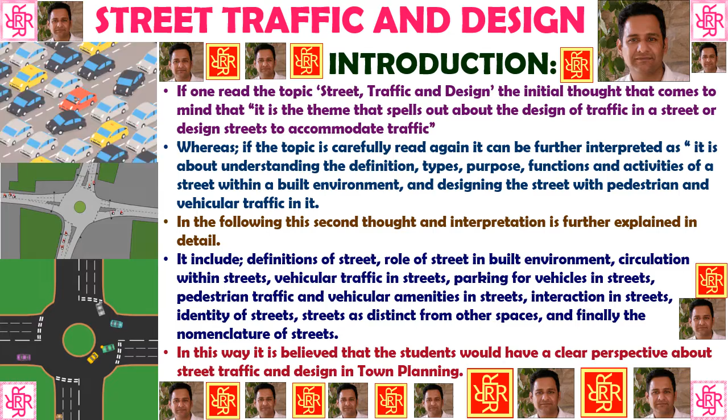It includes definition of a street, role of a street in built environment, circulation within streets, vehicular traffic in the streets, parking of vehicles in the streets, pedestrian traffic, and vehicular amenities in the streets, interaction in streets, identity of streets, streets as distinct from other spaces, and finally the nomenclature of the streets. In this way, it is believed that the student would have a clear perspective about the street traffic and design in town planning. So let's begin with the street traffic and design.

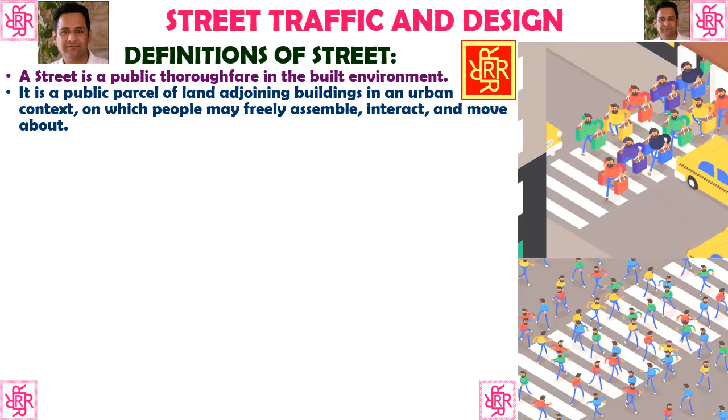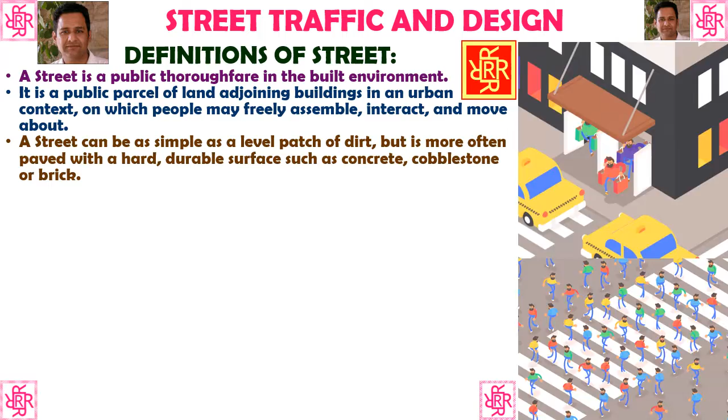Definition of a street. A street is a public thoroughfare in built environment. It is a public parcel of land adjoining buildings in an urban context on which people may freely assemble, interact, and move about. A street can be as simple as a level patch of dirt, but is more often paved with a hard, durable surface such as concrete, cobblestone, or brick. Portions may also be smoothed with asphalt, embedded with rails, or otherwise prepared to accommodate non-pedestrian traffic.

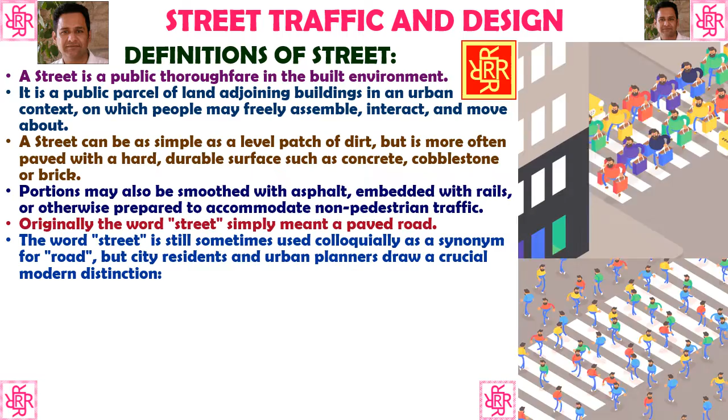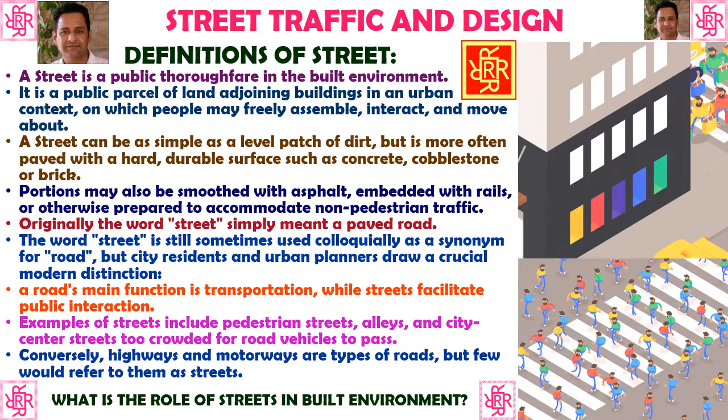Originally, the word street simply meant a paved road. The word street is still sometimes used colloquially as a synonym for road, but city residents and urban planners draw a crucial modern distinction. A road's main function is transportation, while the street facilitates public interaction. Examples of the street include pedestrian streets, alleys, and city center streets too crowded for road vehicles to pass. Conversely, highways and motorways are types of road, but few would refer to them as streets. So what is the role of streets in built environment? Let's discuss.

Role of street in the built environment. The street is a public easement, one of the few shared between all sorts of people. As a component of the built environment as ancient as human habitation, the street sustains a range of activities vital to civilization. Its roles are as numerous and diverse as its ever-changing cast of characters.

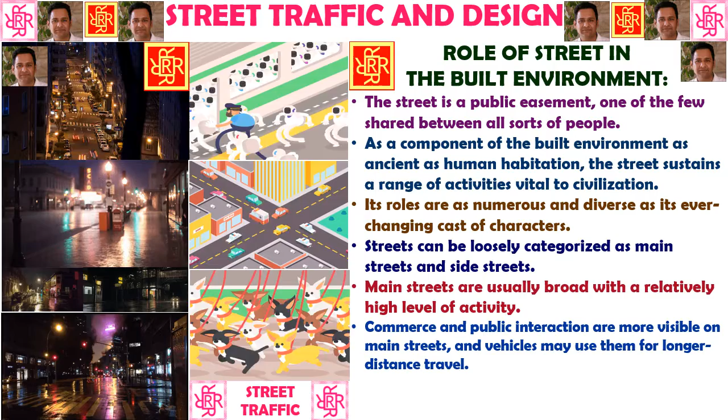Streets can be loosely categorized as main streets and side streets. Main streets are usually broad with a relatively high level of activity, and commerce and public interaction are more visible on main streets, and vehicles may use them for longer distance travel. Side streets are quieter, often residential in use and character, and may be used for vehicular parking.

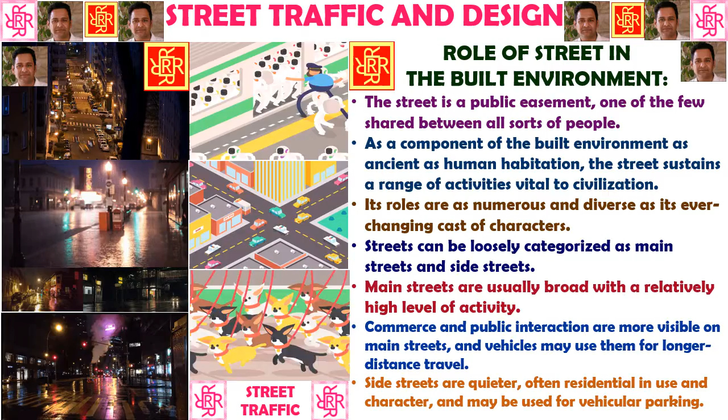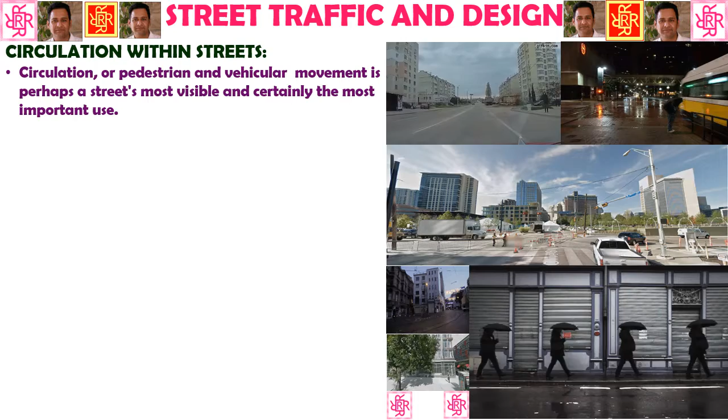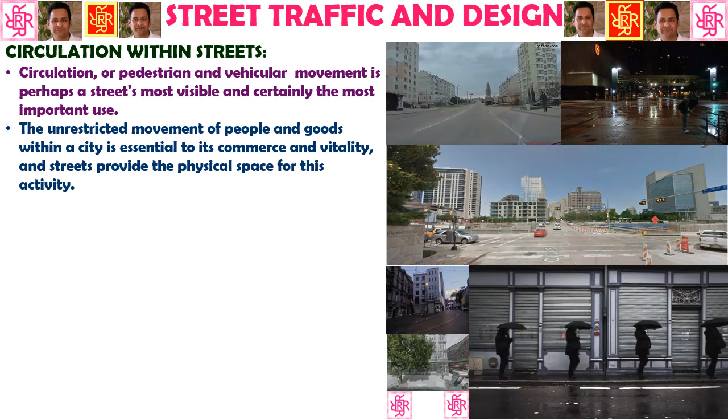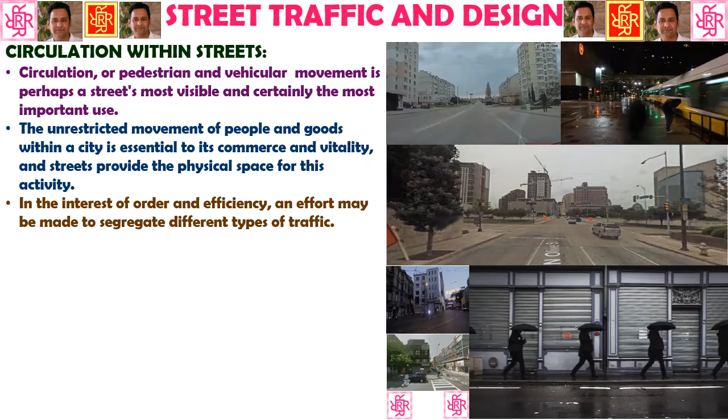How the circulation takes place within the streets. Circulation, or pedestrian and vehicular movement, is perhaps a street's most visible and certainly the most important use. The unrestricted movement of people and goods within a city is essential to its commerce and vitality, and streets provide the physical space for this activity. In the interest of order and efficiency, an effort may be made to segregate different types of traffic within the streets. This is usually done by carving a road through the middle for the motorist, reserving sidewalks on either side for pedestrians. Other arrangements allow for streetcars, trolleys, and even wastewater and rainfall runoff ditches.

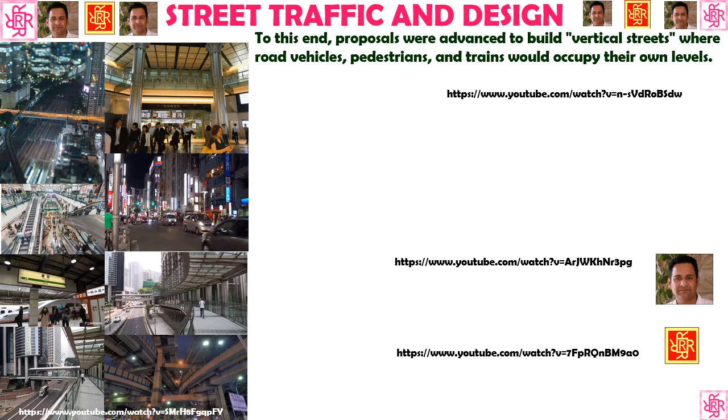In the mid-20th century, as automobiles threatened to overwhelm city streets with pollution and ghastly accidents, many urban theorists came to see this segregation as not only helpful but very necessary in order to maintain mobility of vehicles and pedestrians within the city. To this end, proposals were advanced to build vertical streets, where road vehicles, pedestrians, and trains would occupy their own levels. Such an arrangement, it was said, would allow for even denser development in the future. These plans were never implemented comprehensively, a fact which today's urban theorists regard as fortunate for the vitality and diversity of the cities, the streets and their neighborhoods.

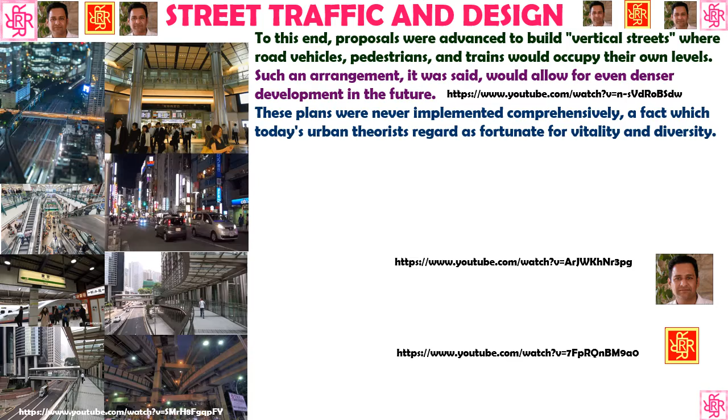Rather, vertical segregation is applied on a piecemeal basis, as in sewers, utility poles, depressed highways, elevated railways, common utility ducts, the extensive complex of underground malls surrounding Tokyo Station and the Ōtemachi subway station, the elevated pedestrian skyway networks of Minneapolis and Calgary, the underground cities of Atlanta and Montreal, and the multi-level streets in Chicago. If you want to see these, I have given you this reference on YouTube. You can see these streets of different kinds.

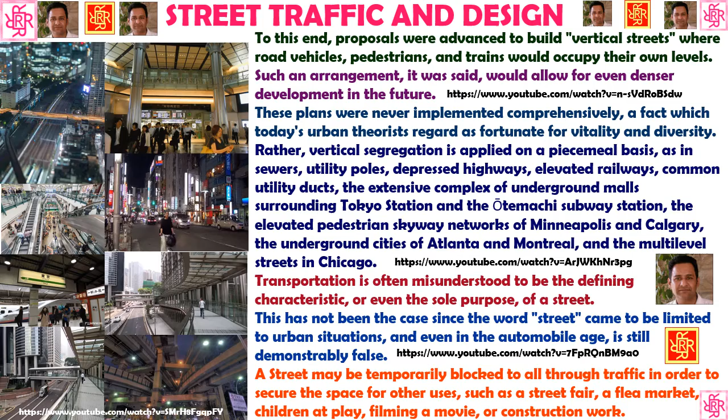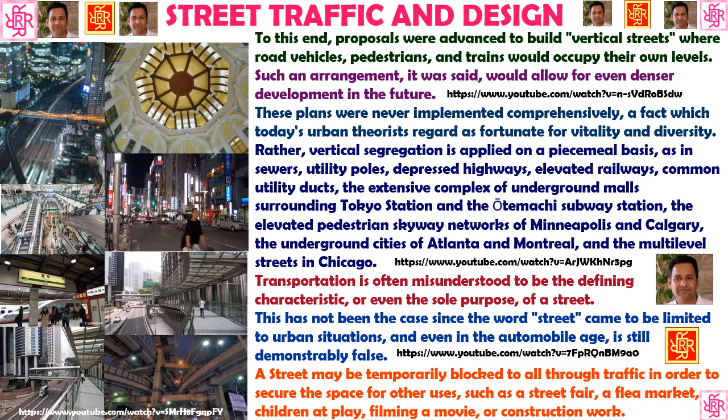Transportation is often misunderstood to be the defining characteristic or even the sole purpose of a street. It is not. This has not been the case since the word street came to be limited to urban situations. And even in the automobile age, it is still demonstrably false. A street may be temporarily blocked to all through traffic in order to secure the space for other uses, such as a street fair, a flea market, children at play, filming a movie, and construction works. So streets have a variety of functions and activities that take place within the street.

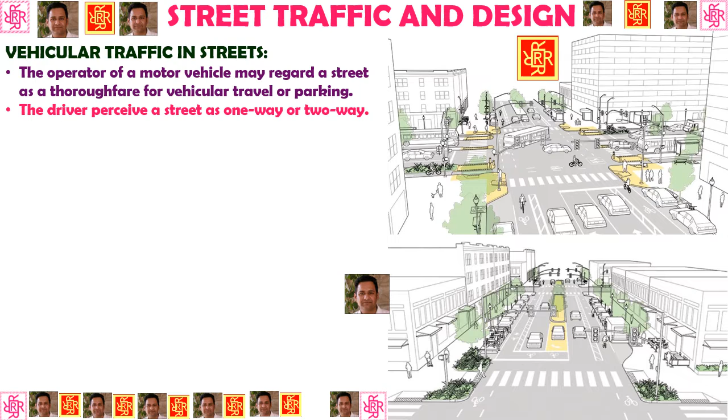What about vehicular traffic in the streets? The operator of a motor vehicle may regard a street as a thoroughfare for vehicular travel or parking. The driver perceives a street as one way or two way. One-way streets have signs reading one way and an arrow showing the direction of the allowed travel. Two-way streets are wide enough for at least two lanes of traffic. Which lane is for which direction of traffic depends upon the country the street is located in.

On broader two-way streets, there is a center line marked in the middle of the street separating lanes. Occasionally, there may be a median strip separating lanes of opposing traffic. If there is more than one lane going in one direction on a main street, these lanes may be separated by intermittent lane lines marked on the street pavement. Side streets do not have center lines or lane lines. So you see that there are various types of streets and vehicular traffic in them.

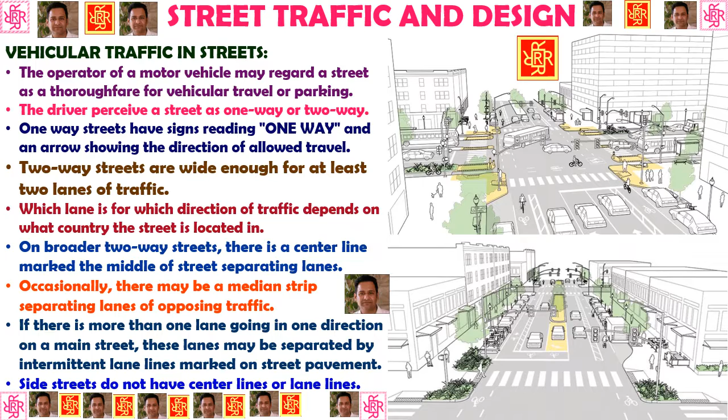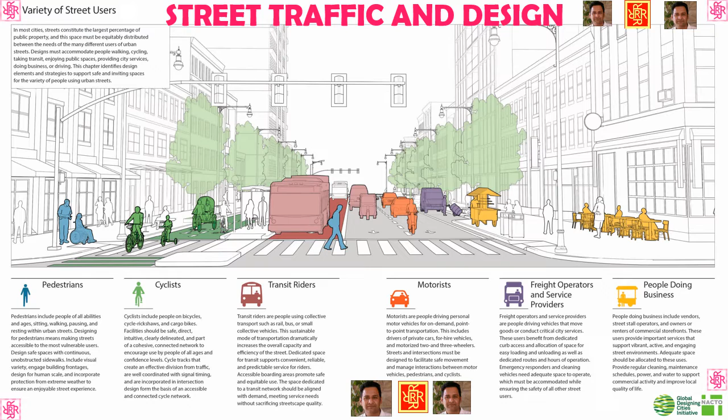Now let's look at street traffic and design. There is a variety of street users. We must know who uses the street before the design of the street. There are pedestrians, cyclists, transit riders, motorists, freight operators and service providers, and people doing business in the streets. So let's talk about these different people and activities within the streets.

First of all, let's talk about the variety of street users. In most cities, streets constitute the largest percentage of public property, and this space must be equitably distributed between the needs of the many different users of urban streets. The design must accommodate people walking, cycling, taking transit, enjoying public spaces, providing city services, doing business, or driving. So this lecture identifies the design elements and strategies to support safe and inviting spaces for the variety of people using urban streets.

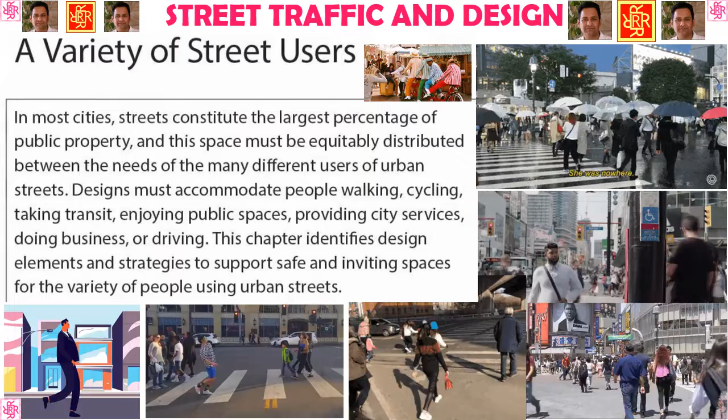First of all, let's talk about pedestrians. Pedestrians include people of all abilities and ages, sitting, walking, pausing, and resting within the urban streets. Designing for pedestrians means making streets accessible to the most vulnerable users. Design safe spaces with continuous, unobstructed sidewalks. Include visual variety, engaging building frontage, design for human scale, and incorporate protection from extreme weather to ensure an enjoyable street experience. As there is a variety of pedestrians, some can walk and some cannot walk, so the street must have smooth surfaces.

Then there are cyclists. Cyclists include people on bicycles, cycle rickshaws, and cargo bikes. Facilities should be safe, direct, intuitive, clearly delineated, and part of a cohesive, connected network to encourage use by people of all ages and confidence levels. Cycle tracks that create an effective division from traffic, are well coordinated with signal timing, and are incorporated in the intersection design form the basis of an accessible and connected cycle network. So the street must have space for cyclists.

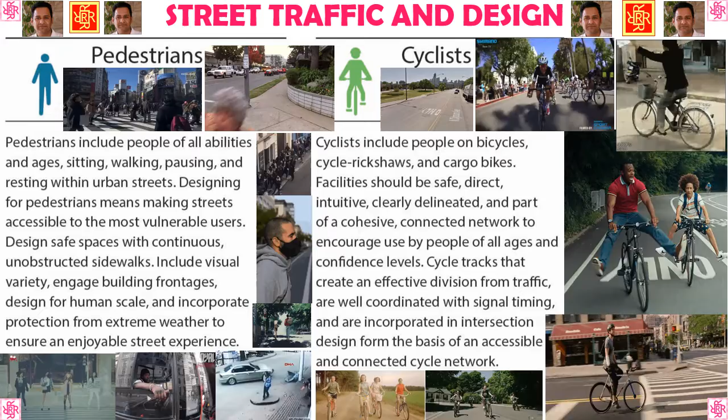Then there are transit riders. Transit riders are people who are using collective transport such as rail, bus, or small collective vehicles. This sustainable mode of transportation dramatically increases the overall capacity and efficiency of the street. Dedicated space for transit supports convenient, reliable, and predictable services for riders. Accessible boarding areas promote safe and equitable use. The space dedicated to a transit network should be aligned with demand, meeting service needs without sacrificing streetscape quality or the beauty of the street.

Then there are motorists, who also use the streets. Motorists are people driving personal motor vehicles for on-demand point-to-point transportation. This includes drivers of private cars, for-hire vehicles, and motorized two- and three-wheelers. Streets and intersections must be designed to facilitate safe movement and management of interactions between motor vehicles, pedestrians, and cyclists. So these are very important elements of street traffic and design.

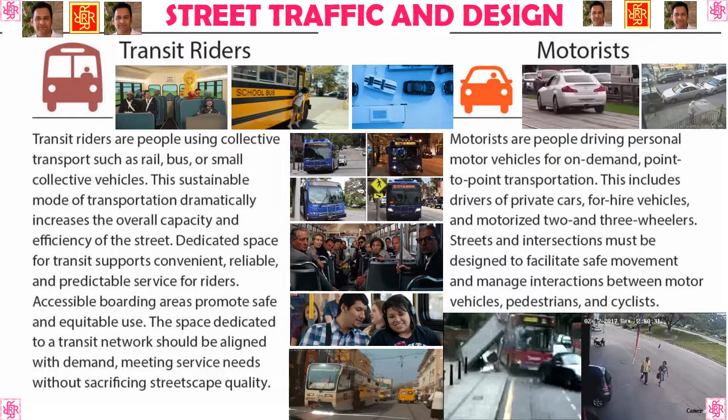Then there are freight operators and service providers which also use the streets. The freight operators and service providers are the people driving vehicles that move goods or conduct critical city services. These users benefit from dedicated curb access and allocation of space for easy loading and unloading, as well as dedicated routes and hours of operation. The emergency responders and cleaning vehicles need adequate space to operate within the streets, which must be accommodated while ensuring the safety of all the other street users.

Then there are people in the street who are doing business in the street. They must also be accommodated. People doing business include the vendors, the street stall operators, and the owners or renters of the commercial street fronts or store fronts. These users provide important services that support a vibrant, active, and engaging street environment. Adequate space should be allocated to these users. Provide regular cleaning, maintenance schedules, power and water to support the commercial activity and improve local quality of life, because these commercial activities are very important for the sustenance of the community living within neighborhoods.

Now, furthermore, there are also some green street principles. Let's discuss green street principles. The first is to protect and restore the natural resources within the streets. Then to promote health, equity and human habitat. Then we should design for safety and mobility. There are also three more. Then there is design for the life cycle. When we design the street, we should design for the whole life cycle. And design for resilience to climate change and other natural and man-made disasters. And there must be optimization for the performance of the streets. So these are the six basic green street design principles.

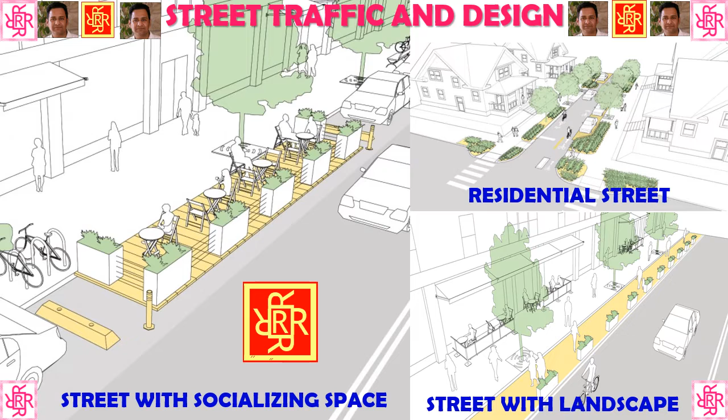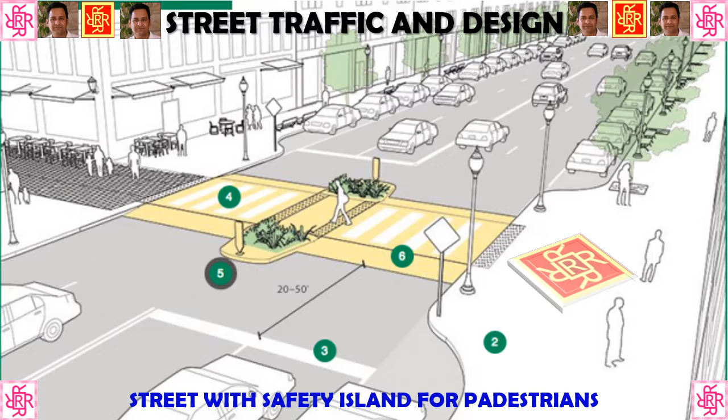Now let's further go and look at different street traffic and design. This is a neighborhood street that you are looking at. Then this is the residential street on the top. Then there is a street with landscape. Then there's a street with socializing space. So a street must have all these different kinds of physical, social, and economic activity spaces for a good, healthy environment and good quality of environment within the street. If vehicles are allowed in the street, it must have a safety island for pedestrians, so pedestrians can be given priority in movement within the streets.

Then there's the concept of a complete street. What is a complete street? Complete streets are streets which are for everyone. A street which can be used by kids, young people, old people, middle-aged people, and people with impairments, who cannot see properly, people who cannot walk, or people who are disabled in any way. So there should be universal design for disabled people and for people of all ages. These complete streets are designed and operated to enable safe access for all users, including pedestrians, bicyclists, motorists, and transit riders of all ages and abilities. So this is also important. We must design inclusive streets.

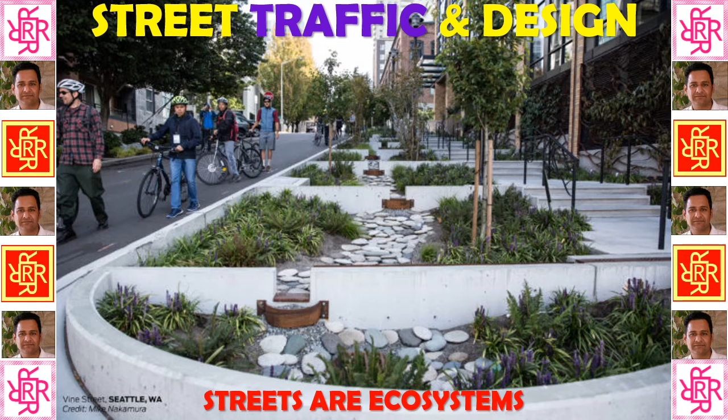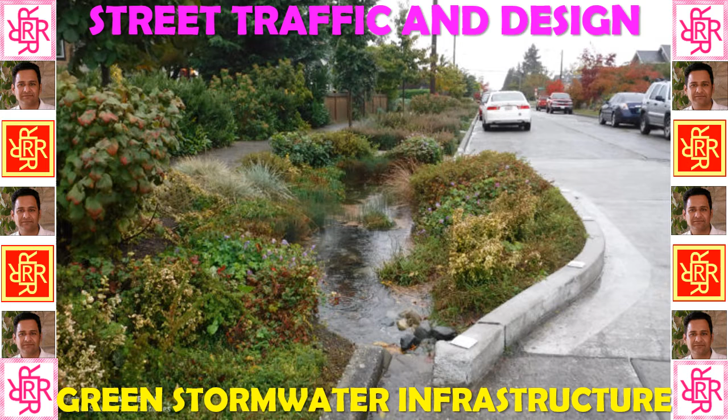Then streets are also termed as ecosystems, because we can make green streets where a variety of animals, birds and plants occur, and we can make a very good, healthy quality environment within the streets. In the developed world, they make green stormwater infrastructure, so when rain occurs, the rainwater drains automatically.

Now there are different types of streets. There is transit streets. Transit streets are those streets which have a bus stop, or you can say tramway stop, or where vehicles and pedestrians go together, and there should be a harmonious circulation pattern. These are the transit streets.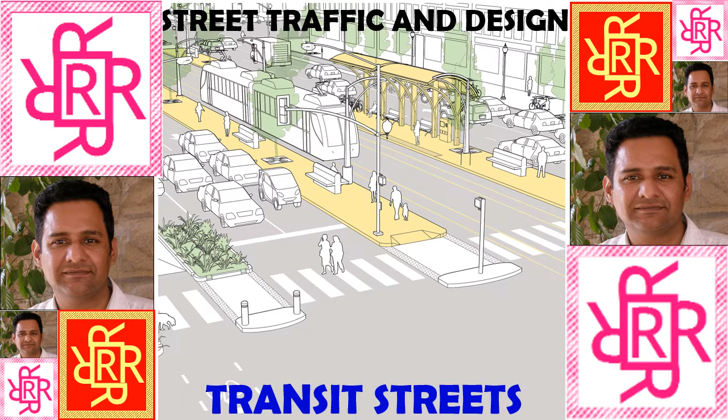You can see how it is divided into different lanes: there is a pedestrian lane, there is a vehicular lane, there is a transit lane, and then there is a social interaction lane. So these are the important things in transit streets. Here you can see the transit streets. Only for bus, there is also the exclusive right of way given to the bus, because it moves a lot of people. There is a city in South America, for example, Bogota.

They have this system where they said, okay, the streets should have equal rights for the pedestrian as well as vehicle. So what they did, they have divided the street in two portions. 50% is for vehicular movement and 50% for pedestrian movement. And whole cities develop like this. You can see such kind of examples all over the world, how the people are given share in the street space, especially the common people who are mostly poor and walk a lot, or they move on cycles.

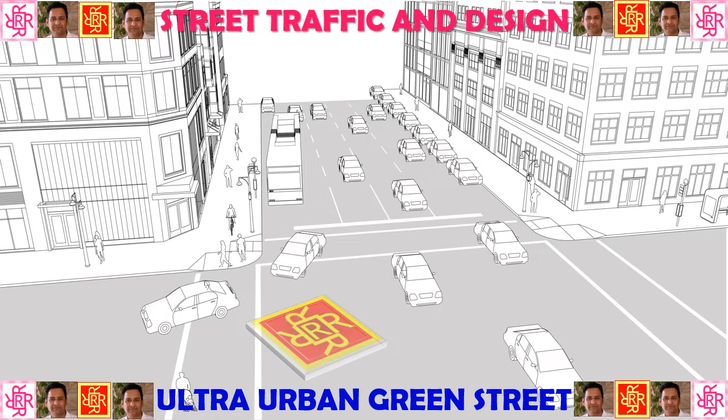Then there are ultra urban green streets. How can we make ultra urban green streets? In order to make them, first of all, tree planting is very important. Then there should be grass planting also, and there should be transit bulbs or boarding islands for the transit vehicles. And this will look like this. And in this way, the ultra urban green street can be created.

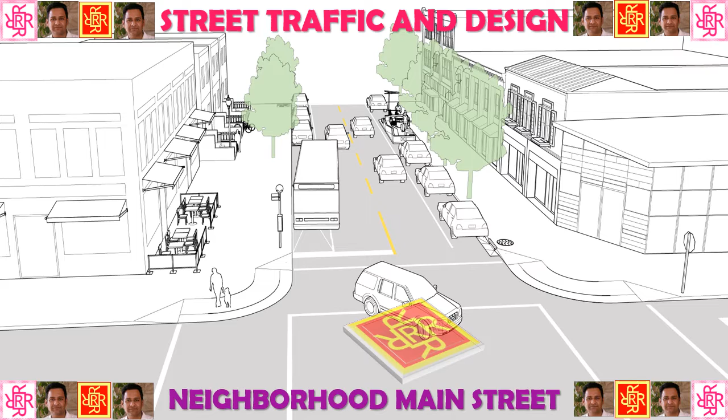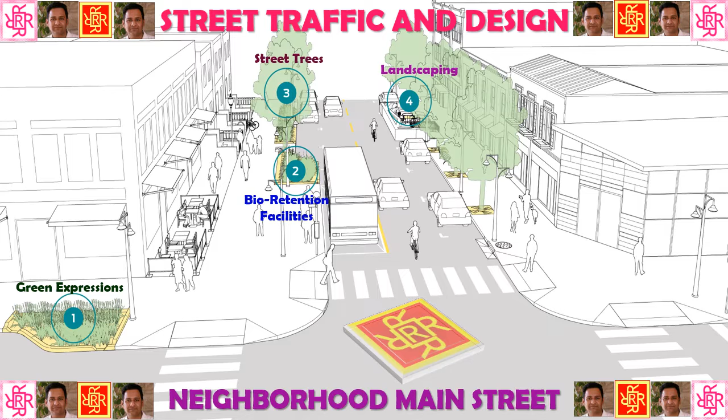The other is neighborhood main streets, because it's also important that when the vehicles are entering the neighborhood, that should be designed properly. For designing neighborhood main streets, we should have green expressions in the street, and we should have bioretention facilities. We should have street trees. We should have landscaping for social interaction, and this will make the neighborhood main street.

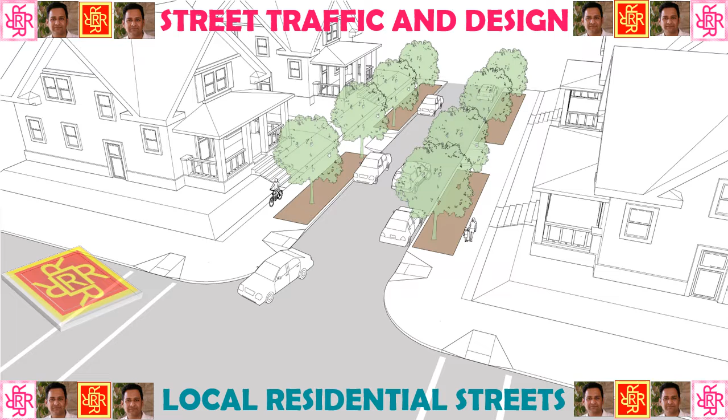Then there are local residential streets, which are leading to different houses. For design of local residential street, it's important that there should be a planting strip, there should be bike boulevard, there should be a mid-block curb, and there should be permeable pavement. And this way, the design of local residential street should be developed. You see that there is a proper movement of the people with disabilities, or people on wheelchairs can also move freely in this kind of local residential streets.

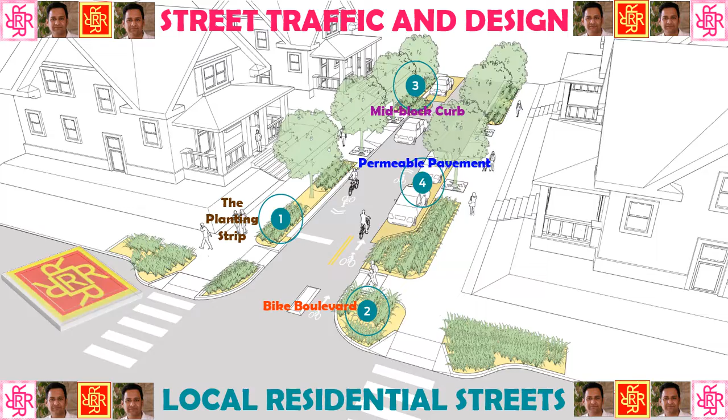Now, furthermore, there are residential shared streets. For that, there must be textured or permeable pavements. There should be trench drains to collect runoff. We should grade the street, and there should be gateway treatments. And in this way, a beautiful residential shared street can be designed.

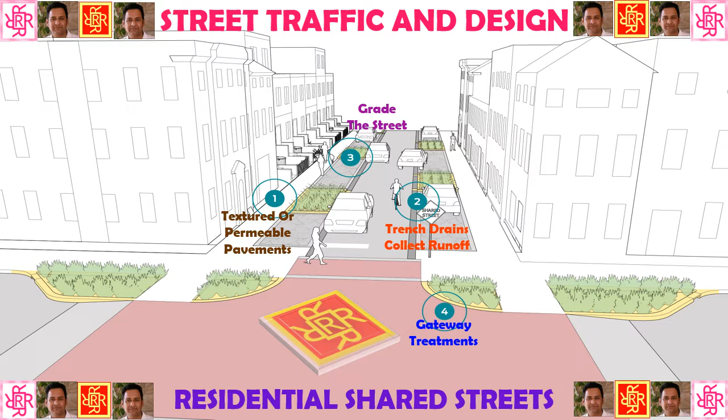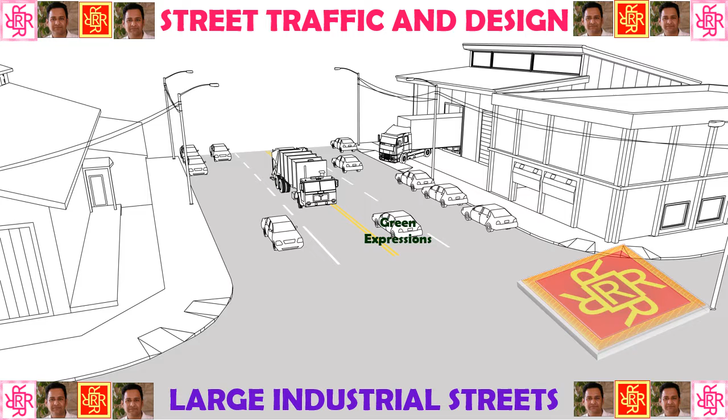Then there are large industrial streets. In the industrial zone, the street design has a different perspective. For large industrial streets, we must have green expressions. We should shorten the crossing distances. We should add bikeways and a parking lane. In this way, we can design the large industrial streets.

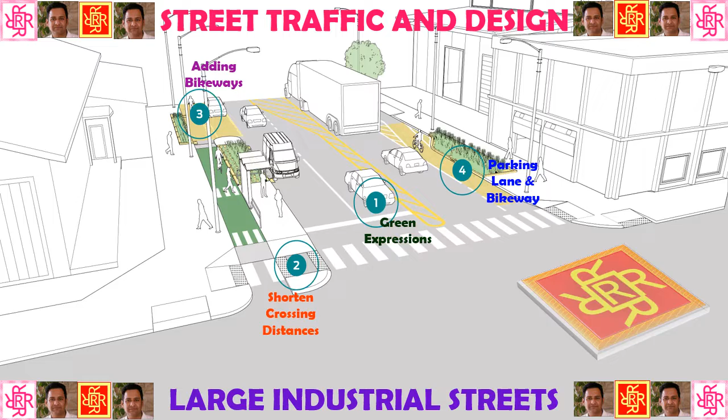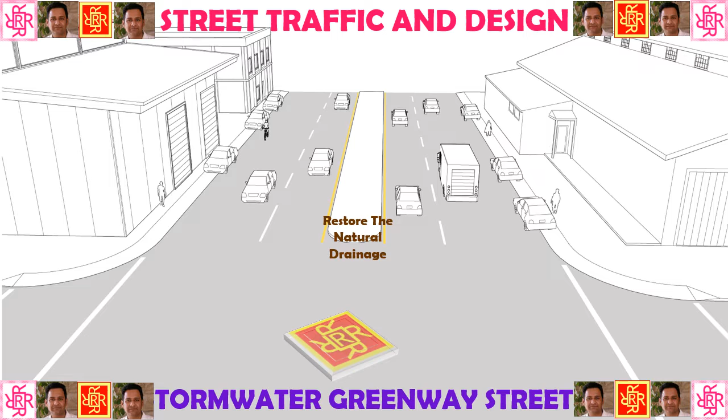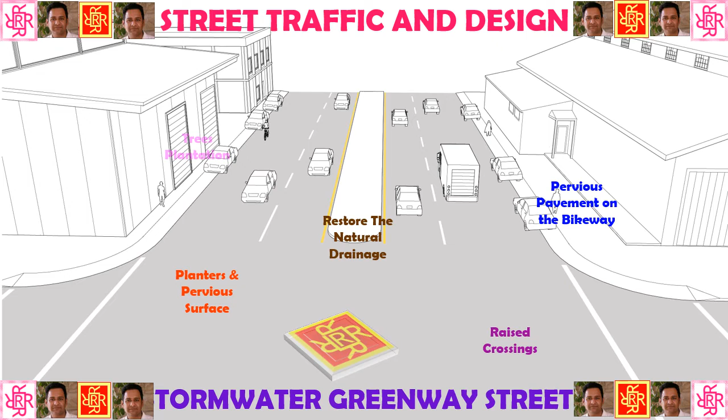Furthermore, if we go ahead, there are stormwater greenway streets. For a stormwater greenway street, first of all, the natural drainage should be restored. There should be planters and pervious surfaces, raised crossings, pervious pavement on the bikeways, and tree plantation. In this way, we can make a beautiful stormwater greenway street. In our city, you find there are so many nadis and nalas, and people are living along them. But these streets should be properly designed and developed, like this example.

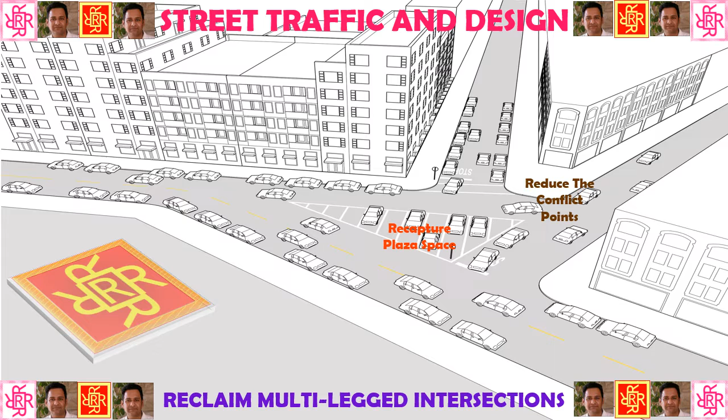Furthermore, we must reclaim the multi-leg intersections, because these are very important places which should not only be used for parking, but for social interaction, for fulfilling the social needs of the people. For that matter, we should reduce the conflict points, recapture the plaza space or public space for social interaction, and connected tree trenches should be developed. And you see, in this way, a vehicular space used only by vehicles is now a beautiful place for people's social interaction. This kind of design is also important for street traffic and design.

Conclusion. Streets are basically public space. You must understand and realize that. They should be conceived, analyzed, evaluated, and designed as public spaces with human scale design and amenities. Cities are also recognizing that streets are one of their greatest assets. A tremendous amount of land is covered by the streets in our cities. So streets should be judged by how much they can attract foot traffic and vibrant city life as much as their ability to move vehicles through quickly. As engineers, we always think most about the vehicles, but as architects, urban designers, and town planners, we must think more about people's movement and social interaction.

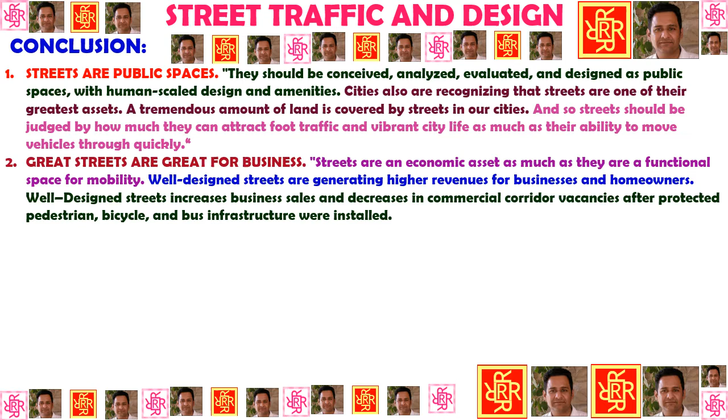Then, great streets are great for business. Streets are an economic asset as much as they are a functional space for mobility. Well-designed streets generate higher revenues for businesses and homeowners. Well-designed streets increase business sales and decrease commercial corridor vacancies after protected pedestrian, bicycle, and bus infrastructure is installed. Usually, in our context, we commercialize the streets a lot, and we do not give proper care to the pedestrians and the vehicular movement in them. This should be properly designed and developed.

Then, streets can be changed. Transportation engineers and planners have the ability to work flexibly within the right of way of the streets, moving curbs, changing alignments, redirecting traffic where necessary. Then, we should design for safety. It is one of the major street traffic and design principles. From 2001 to 2018, more than 4,800 people died while walking on the streets in Karachi. That number is completely unacceptable and we can do much better. Those injuries and deaths on the streets in Karachi can be avoided, and we need to do a better job of designing our streets for safety, so all users can interact and cross paths safely in the streets of Karachi.

Then, streets are the ecosystem. This is also another important concept to understand. We can't just treat them as asphalt or concrete covering the ground. No, we need to incorporate them into the ecosystem of the city. That means green infrastructure and stormwater management, trees that provide shade, and we should get the climate benefit from providing landscape in the city. So this is also an important aspect of street traffic and design. I hope you have understood very well what street traffic and design is.

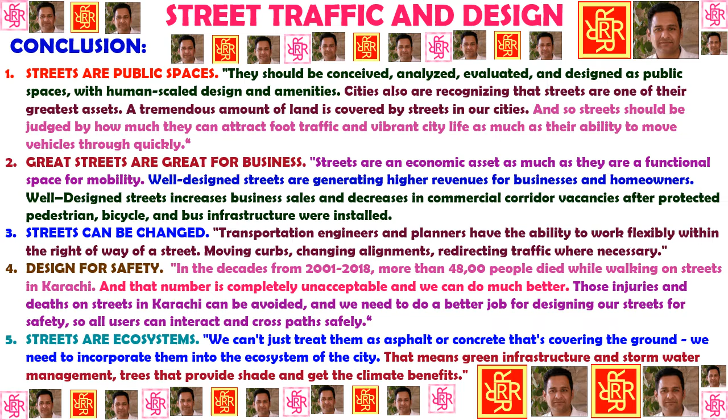Let's go ahead. Finally, let's look at a couple of videos about street traffic and design case studies abroad. This is the Complete Street Design Guideline project, Toronto.

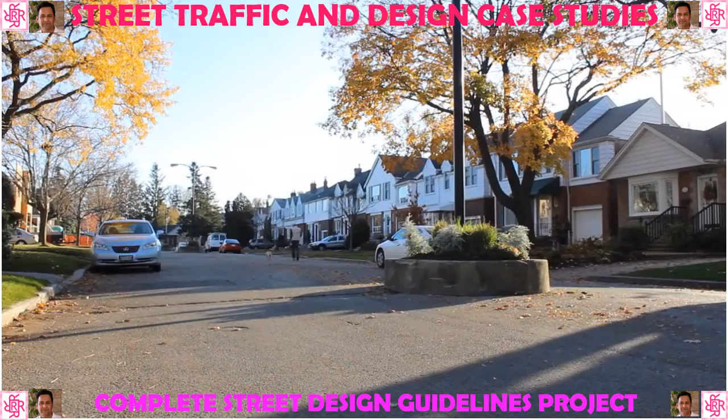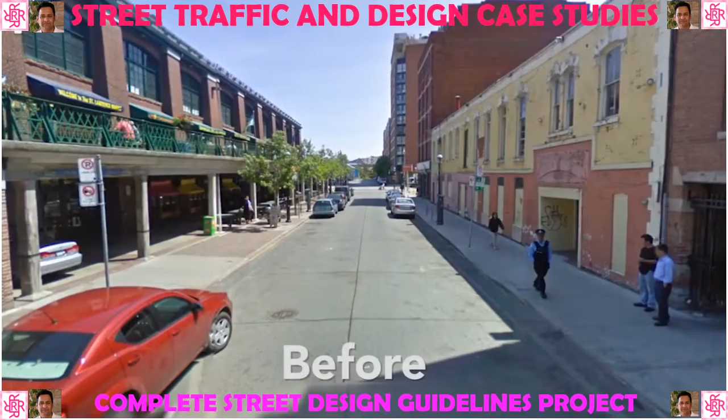Complete streets is a word that kind of emerged to talk about really planning streets for all users and uses. It's about balancing all the needs of where people live, where they work, where they commute, how they enjoy the public spaces along streets. It's about blending all those things in, and thinking about those things when you plan, design, and engineer a street. It is not one size fits all. We need to tailor-make the solutions to fit the local conditions, the site constraints. And streets really are intended to be public and social spaces, as well as their role to move vehicles, pedestrians, transit, and as places for utilities. When we design our streets for people, it's possible to choose how you're going to move around the city, because all of the infrastructure options that make walking or cycling or taking transit or driving safe options exist to make that possible.

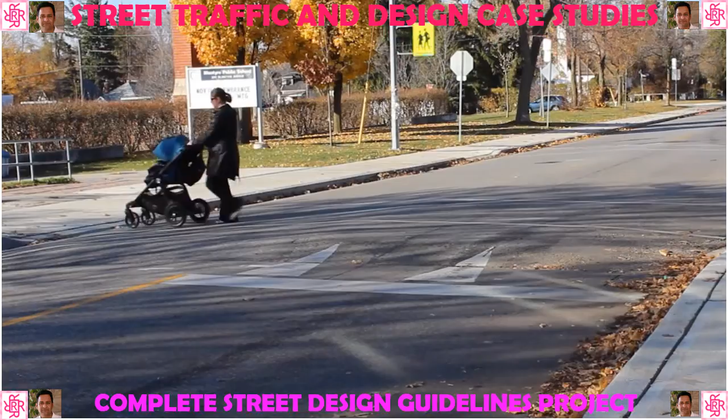We're looking at doing things like improving accessibility for persons with disabilities, making better ramps at curb locations, and also providing detection out there. Better growing environment for trees is really important, and that's what we would really like to see. It's great to see that trees and vegetation is being considered on equal footing with the other infrastructure.

Better water quality, better management of stormwater, improves air quality, improves vegetation, life of trees, the aesthetics, all of those things we can accomplish by designing things properly. People want to enjoy their streets. It's just not a place to commute through. It's a place to shop, to live, to enjoy. And complete streets is really critical in that regard.

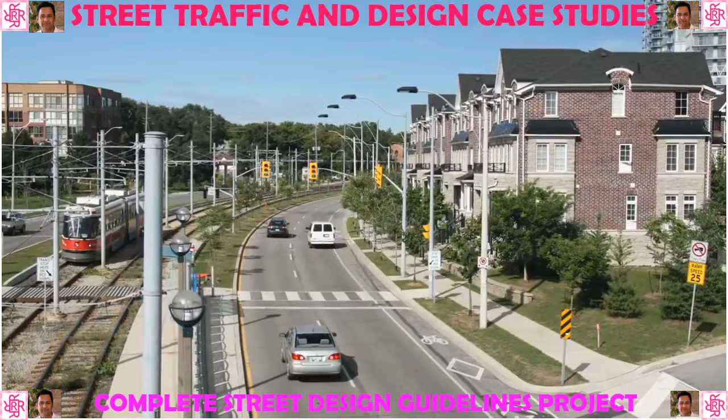Toronto already has some great streets, and I think what we're looking to do is figure out how we replicate the things that we do well here even better. The goal here is we want to provide useful guidance, both internally for our design teams and also externally for private partners who are also redeveloping. It's also an efficiency thing in terms of construction. We don't want to keep on tearing up our streets.

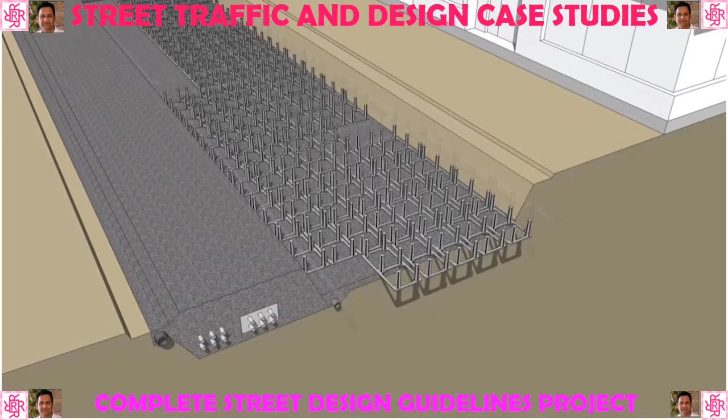So when we plan a complete street, we think about the underground utilities, the sidewalk, the trees, how it drains, bike parking, bike lanes, all those things make a complete street. So what we're doing here today and what we're launching here today is a collaborative process between transportation services and city planning to create our complete streets framework and design guidelines for the city of Toronto.

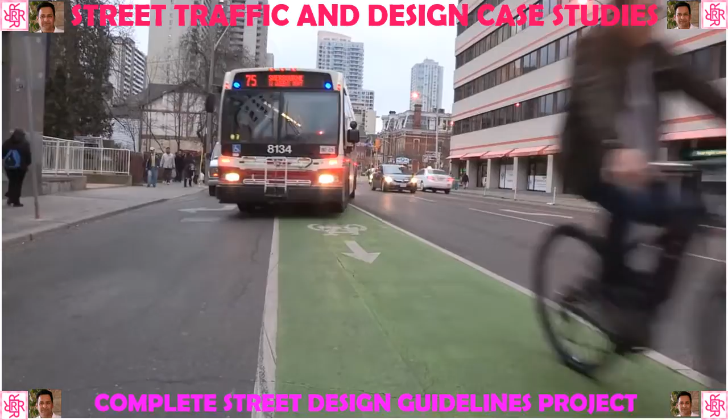We understand the issues within the public rights-of-way in Toronto. We meaningfully engage both with staff, with the broader public, and in smaller workshops. We realize that we are dealing with a multidisciplinary issue, a multidimensional opportunity, I would say. Complete streets or street design is more than a little bit about health. People are much more likely to be out and physically active if they feel that it is safe.

This city is intended to be a city where people who do not have a car are not at a disadvantage. So the city streets must be used to move people, not just vehicles. We understand Toronto's streets, not just downtown, but in all parts of the city. Creating complete walkable communities where we have meaningful work and an opportunity for everyone to thrive is a critical center point to our official plan. Effective, meaningful, and implementable complete streets design guidelines are more important than anything else, a reflection of your values.

The way to be successful is collaboration. There's lots of different constituents, lots of different priorities. The consultant said this is about values. Everybody has a lot of different ideas about what is important in this. So starting to build that consensus and engage people. I think it's really important to incorporate and engage children and families in street design.

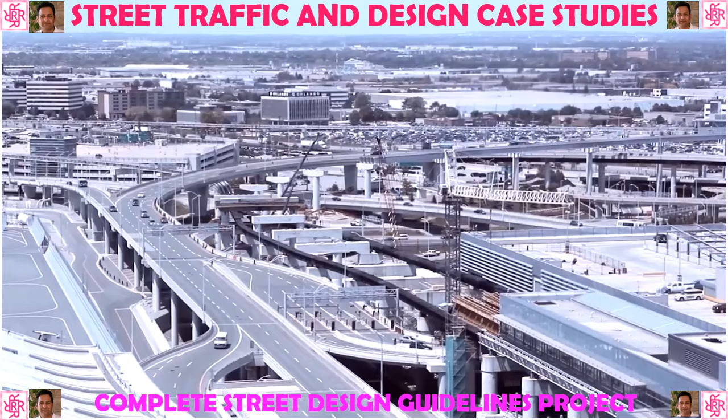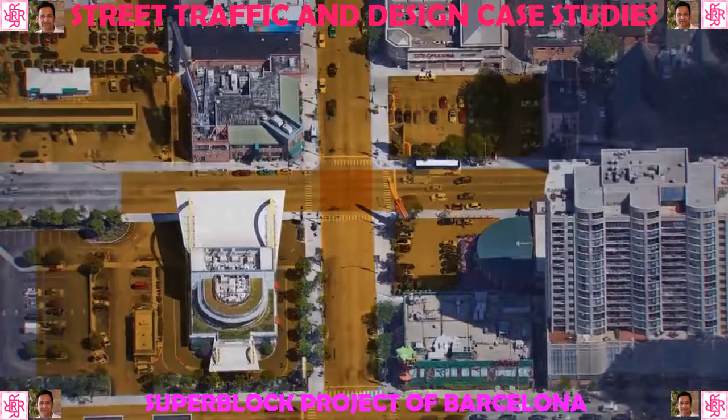So you have seen how internationally people think about designing their streets. Let's look at another case study. Concerning street traffic and design, this is a case study of the superblock project of Barcelona. If you imagine a typical American city street and you take away the space that's dedicated to cars, you aren't left with very much. There's some narrow walkways on the side and some bridges in between them, but not much else.

Cars dominate cities. Spend some time walking around most cities and you'll find yourself pushed to narrow sidewalks, waiting for crosswalk lights. You'll find cyclists navigating really narrow strips of space. Americans are used to cars the way that fish are used to water. And that's so ubiquitous in the US that I think most people, it just never occurs to them that it could be otherwise. But what if there were a way to change that, to give space back to pedestrians and bicyclists, and to make cities more friendly to life outside of a car? It turns out Barcelona might have a solution.

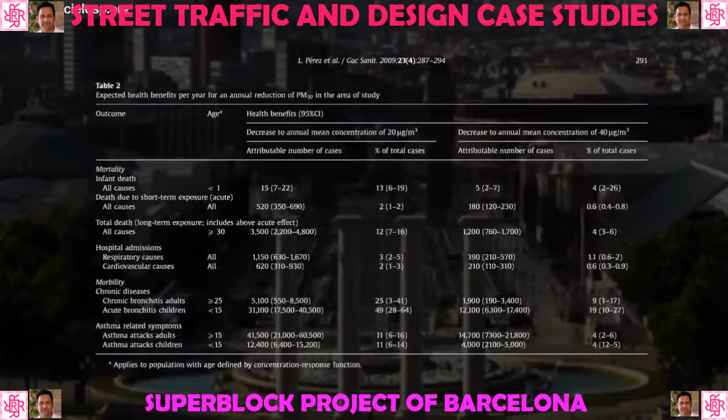In 2014, the city was faced with serious air pollution problems. Barcelona and its 35 surrounding municipalities consistently failed to meet the EU's air quality targets, and studies were showing that air pollution in the region was causing 3,500 premature deaths every year. Traffic in the city also causes severe noise pollution. So the city developed an extensive urban mobility plan with the hope of reducing traffic by 21%. The coolest part of the plan were these things.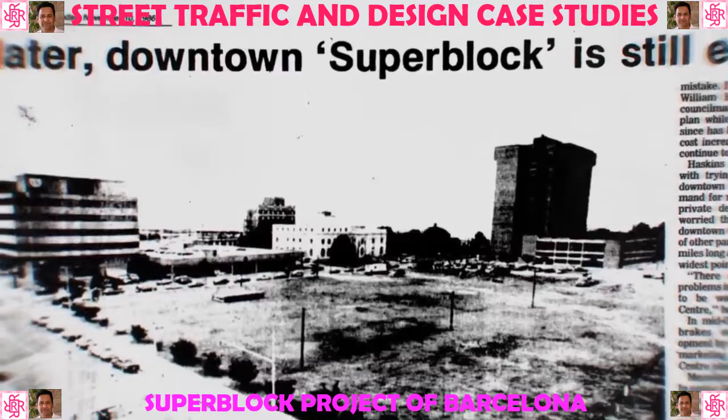They call them superilles. Superillas? Sí, superilles. That translates to superblocks. It's this urban design concept intended to minimize the presence of cars in city centers. The word superblock has been used before to describe huge city blocks without any passageways for cars, but that's not what's happening here. So here's how Barcelona's plan works.

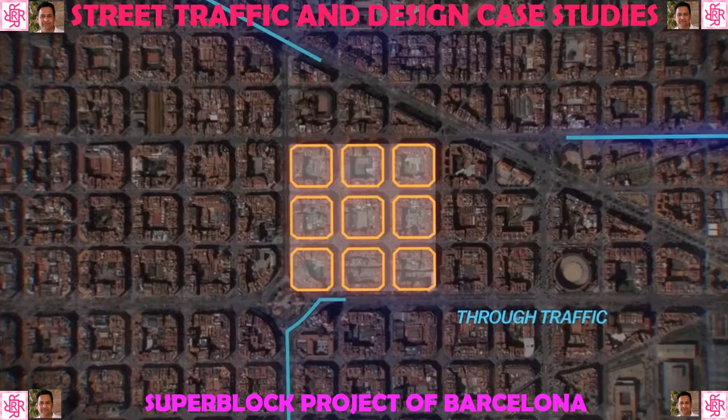You take 9 square city blocks and you close off the inside to through traffic, so buses and big freight trucks, or any vehicles that are trying to get from one part of town to the next, have to drive around the perimeter. Inside the superblock, the speed limit is kept to 10 kilometers per hour. That translates to just over 6 miles per hour. And curbside parking is replaced by underground parking.

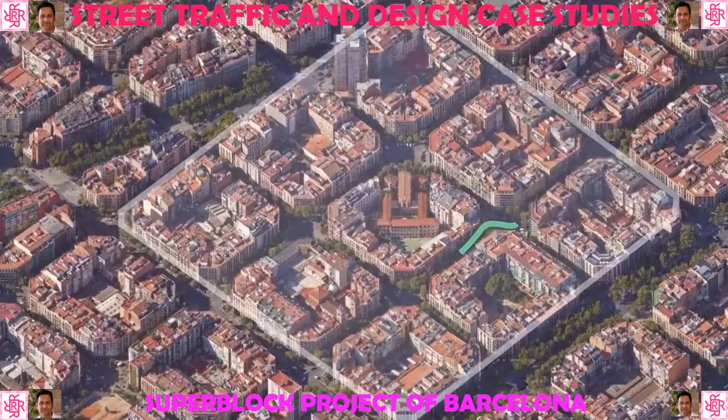And that means you wind up with street space for markets and outdoor games and events. Within this 9 square block perimeter, you're going to have kind of a pleasant streetscape where people can walk around and mingle and do things without this kind of constant fear of cars around. The concept is going to be tested out in 5 neighborhoods, but the city has identified 120 possible intersections throughout the region where it could be implemented.

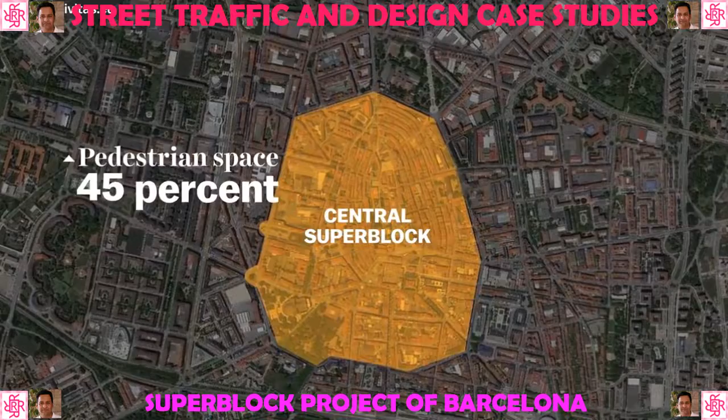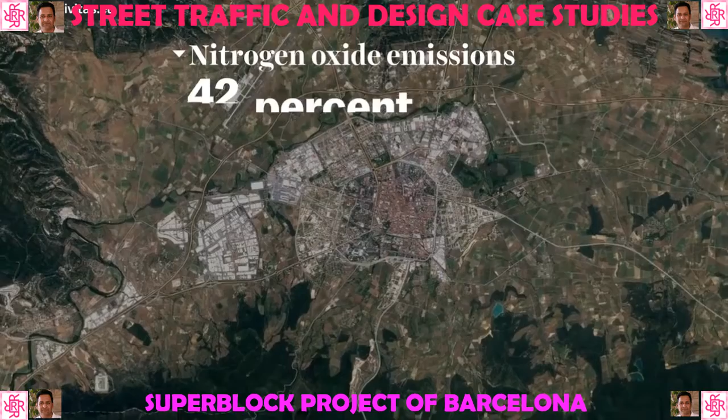So how do we know what the results of this kind of plan would look like? Well, northwest of Barcelona is a city called Vitoria-Gasteiz, which has implemented superblock designs since 2008. In the main superblock at the city center, pedestrian space increased from 45% of the total surface area to 74%. And with so much less traffic, noise levels dropped from 66.5 decibels to 61 decibels. Most impressive of all, there was a 42% reduction in nitrogen oxide emissions and a 38% reduction in particle pollution in the area. And on top of that, business is up.

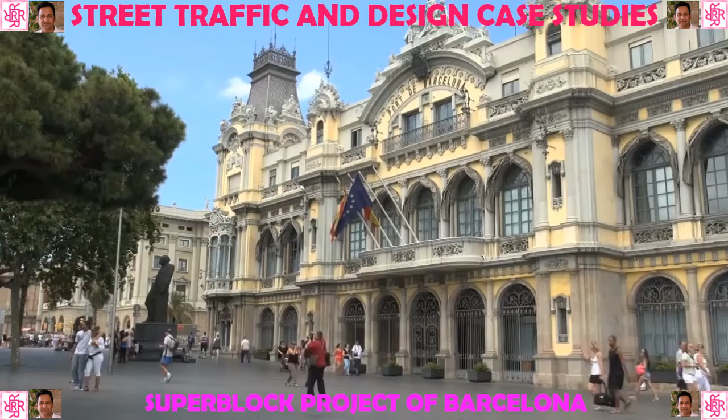What you consistently see when people change their streetscapes to prioritize human beings over cars is you don't see any decline in economic activity. You see the opposite. You get more people walking and cycling around more slowly, stopping more often, patronizing businesses more, and that sort of center of social activity will tend to build on itself.

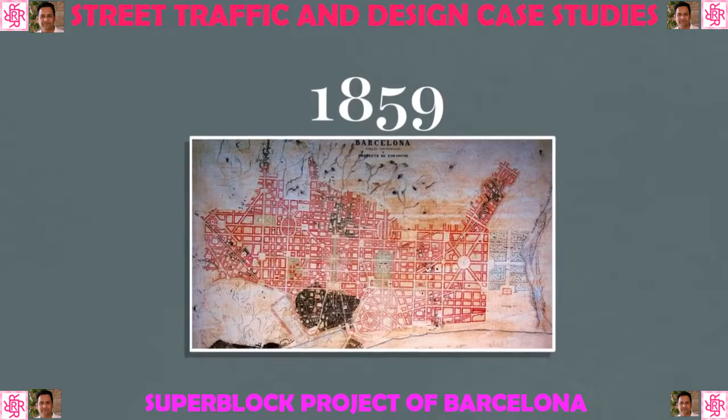So here's the question. Could something like this work in an American city? Barcelona has some unique advantages getting started on this plan in that a lot of it was built before cars and a lot of it was built on a simple grid. The district of Eixample, which is where the superblock plan is based, was designed in 1859 in this repetitive grid structure by this guy, Ildefons Cerdà. He basically invented the word for and the study of urbanization when he laid out this grid plan for Barcelona that evenly distributed resources like schools and hospitals.

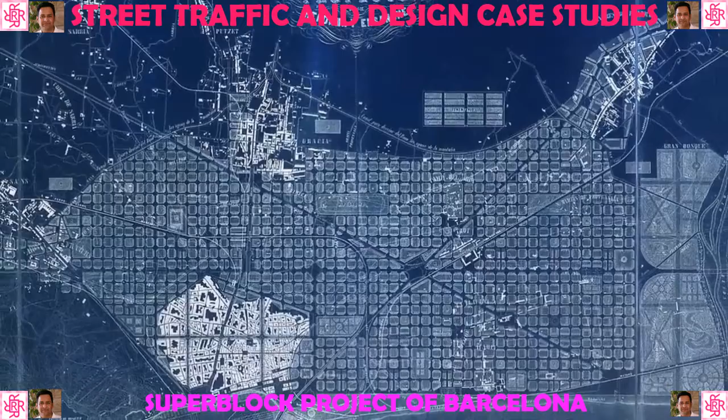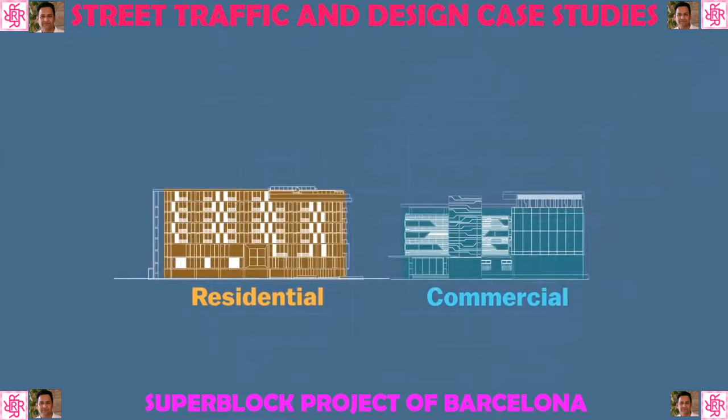But superblock designers insist that cities don't need a simple grid structure to implement this kind of plan. It can work anywhere. Now, cities in the US have attempted some car minimizing projects like this. The problem is they're usually done in wealthier areas with lots of existing businesses. Zoning policies often require separation of residential areas and commercial areas, but an ideal walkable area would be a mix of the two. On top of that, zoning minimums on parking availability encourage the presence of cars and parking lots, and minimums on street width make for really wide, unwalkable streets. And because of that, walkable districts are basically isolated luxury items in the US.

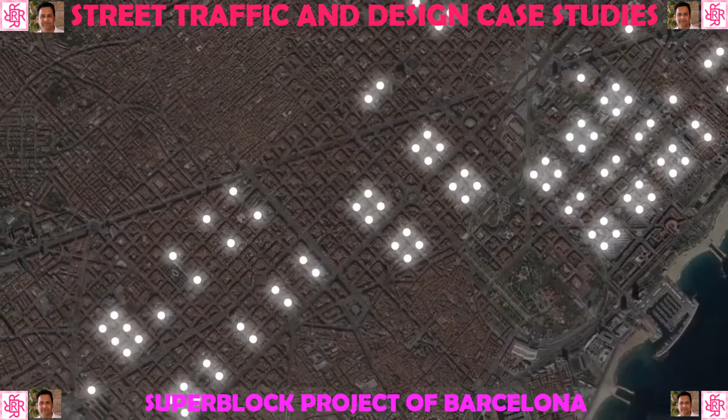What makes the Barcelona plan different is that they aren't setting aside one fancy neighborhood or town square to make pedestrian friendly. Instead, by proposing superblocks throughout the entire city, they've declared car-free spaces a right for everybody, no matter what part of town they're in.

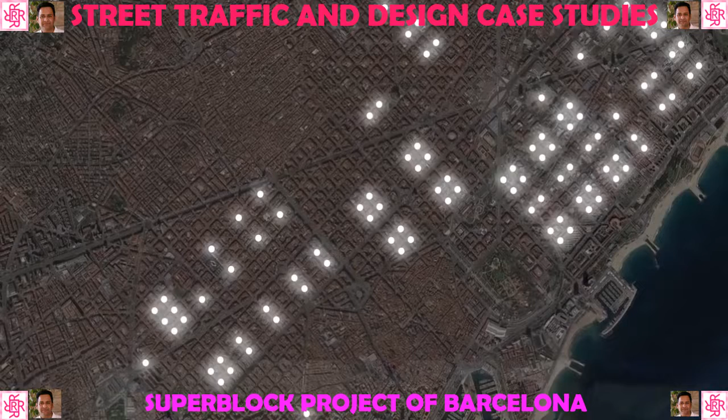Maybe this might be overly optimistic, but I think it's sunk in the US that the model whereby every city resident comes with a car and drives a car everywhere is just inherently limited. It limits the health of your city and the growth of your city. So one way or another, we have to find ways of having a lot of people live close to one another without all of them having cars, being able to get around and work and play and live and have enjoyable lives.

So you have seen how internationally street traffic and design is taken into consideration and how pedestrians are encouraged and vehicles are discouraged in the cities, and that is the basis of the street traffic and design.